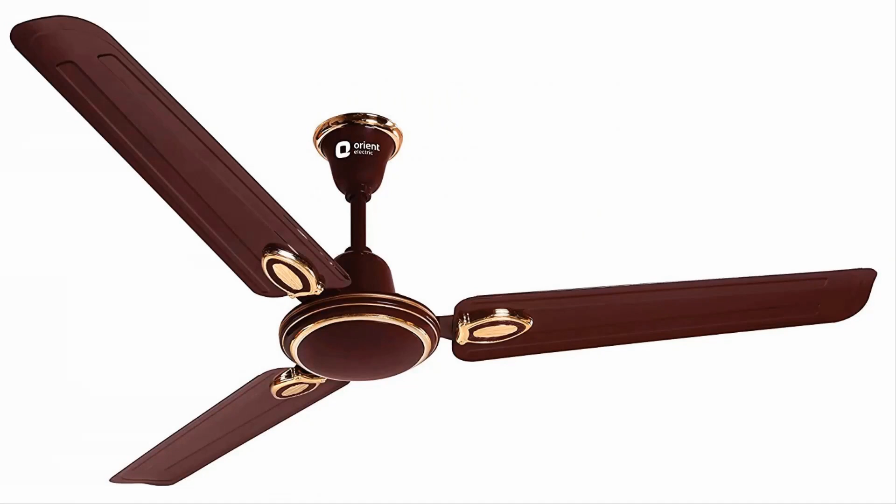An assembly is a collection of products placed together in such a way that they serve a purpose. Most of the components that you see around are assemblies. For example, a phone is an assembly consisting of components like keypad, screen, SIM card, and many chips and screws inside. A ceiling fan is a collection of wings, ball bearings, motors, screws, etc.

An assembly can have a sub-assembly. For example, a pen has a refill, cap, and base container. A refill itself is an assembly of a plastic ink container and the tip for writing. So the refill is a sub-assembly fitted into an assembly.

Now that we have learned modeling products, let us move on to assembling them. The Assemble option in Fusion 360 will allow us to position different parts with respect to each other, and also leave some degrees of freedom to move if required.

I am creating a new file and going to save it as Train Toys.

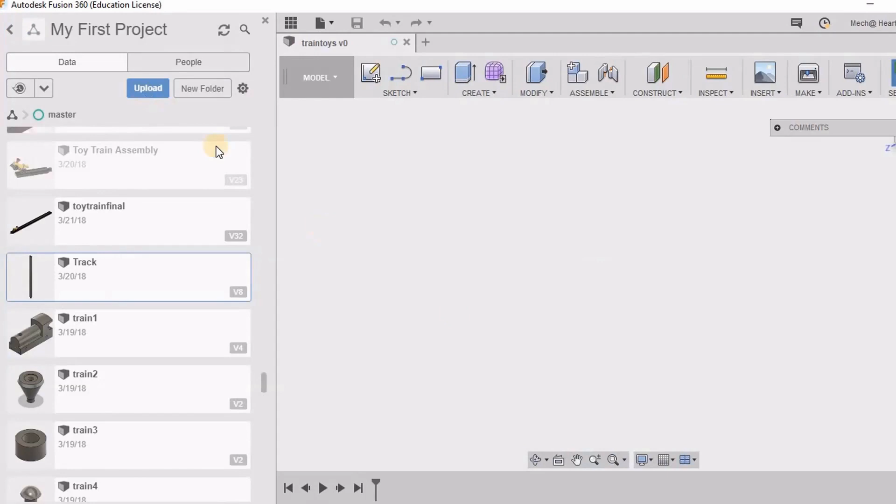Now I am going to the data panel and going to get my parts one by one. When I right click on a part, if I click open, the part will open. But if I click insert into current design, this part will be inserted into the assembly.

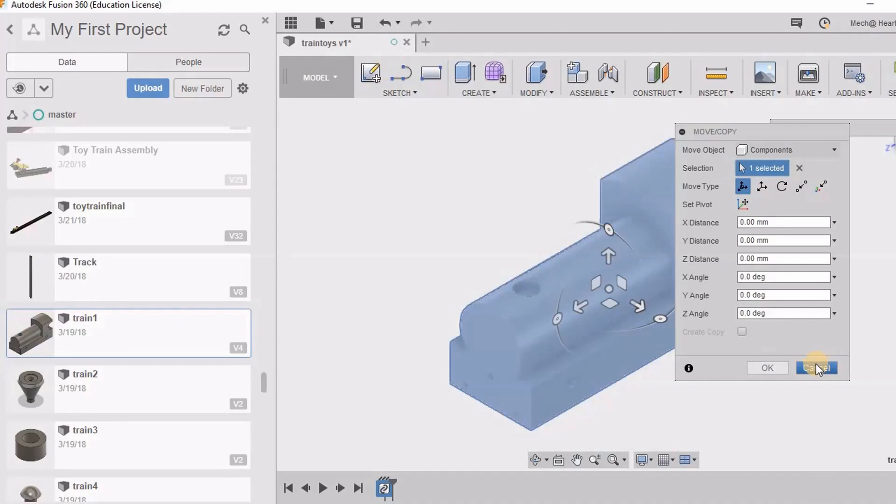Now it is asking me for the correct position. Currently, whatever position is there, I am going to say OK. Similarly, I'll be getting another component. I'll right click and say insert into current design, or I can even pull it into the current design.

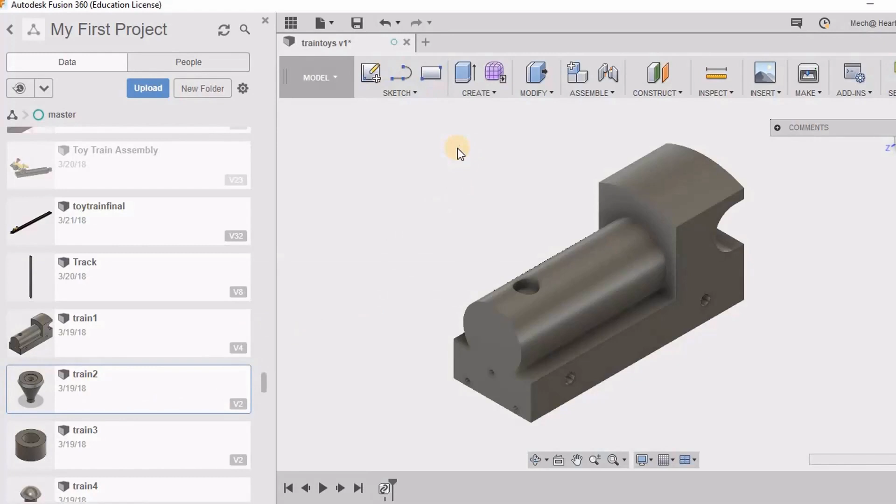So I'm closing this data panel. Now it is again asking me for the positions, so I'm going to click cancel. I can move it over here so that I can see this component.

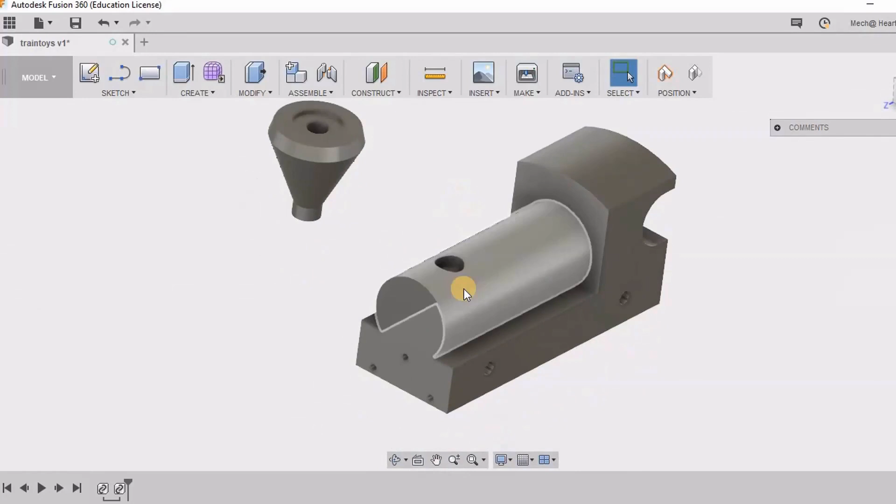The first component that we see here can be grounded. That is, with respect to this component, I'll be assembling the other parts to this. So I'm going to ground this component.

So I'm going to first see my browser, and here I have this train. I'll just right click and say ground. You can see the small grounding symbol that is appearing near this part.

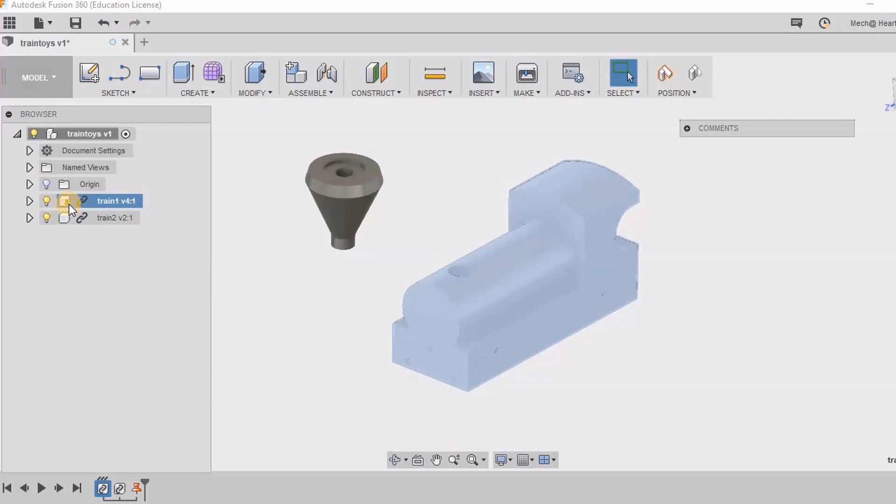So let us start assembling it. Now this portion should go inside this portion. So I'm going to click Assemble and then Joint. The shortcut key is J.

Here you can see I've got the command. Now, as you have seen, I had pulled this component, so it is asking me whether it needs to capture the current position or it can continue in the previous position. If I say continue, it will continue in the previous position.

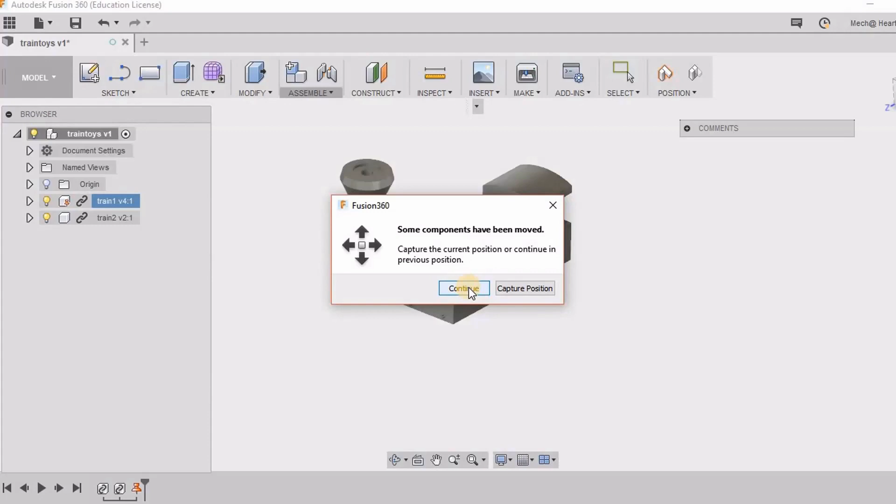For example, if I'm clicking continue, you can see it has come back to the old position. But I want this to be at this position so that I can see this product properly, as otherwise it was intersecting with the previous product.

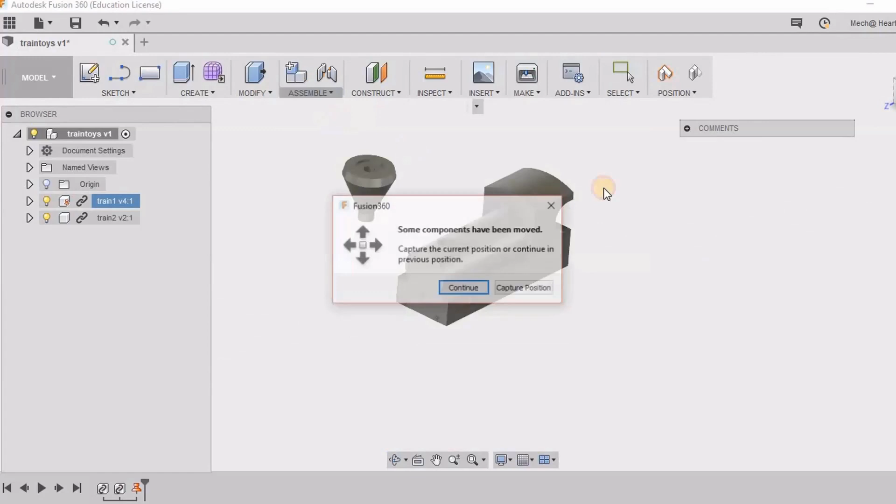So now I'm going to click assemble and joint. I'm going to click on capture position so that this remains here itself. Now here I have got component 1 and component 2. In component 1, whatever object I am going to select, that will be moved to component 2.

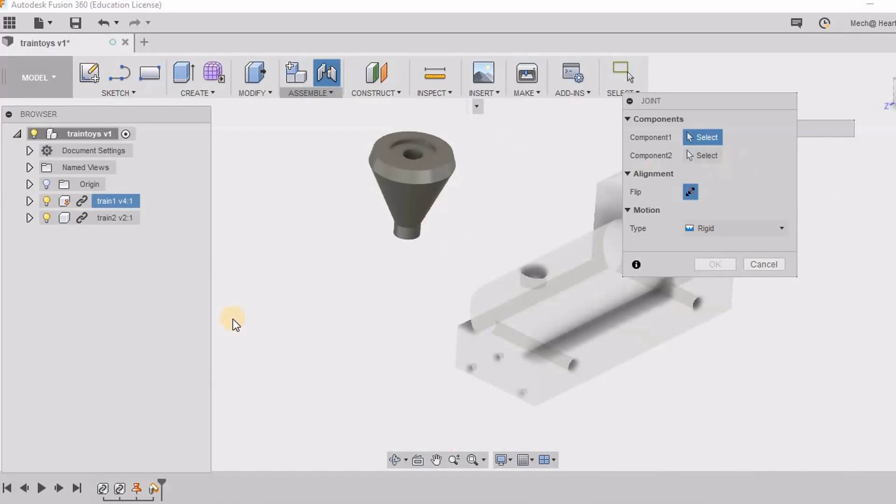That is, here I am going to select this option. So this point that I am going to select is going to be coincided with another exactly similar point that I am going to pick on component 2. So here I am clicking this.

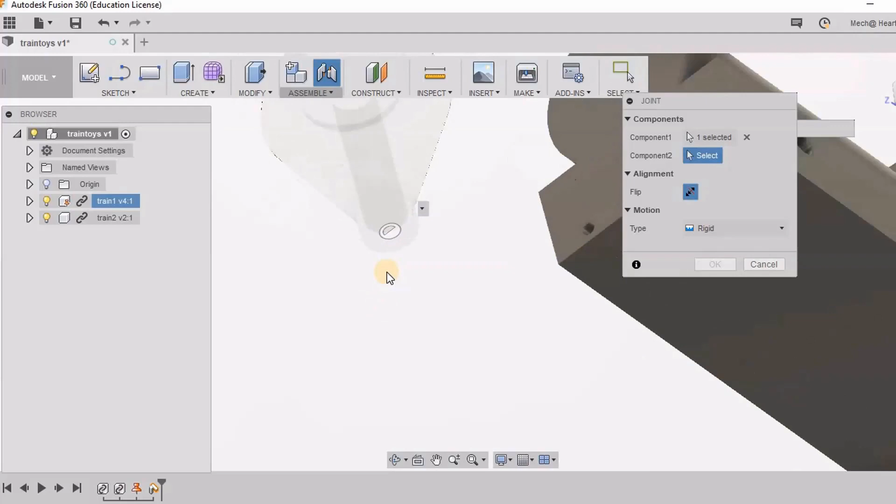My next component is going to be this. Anyway, there's only one left, and because it is grounded, anyway this component will come to this. But even if it is not grounded, the first component will always be moved to component 2. So here it is showing me different options where I can select.

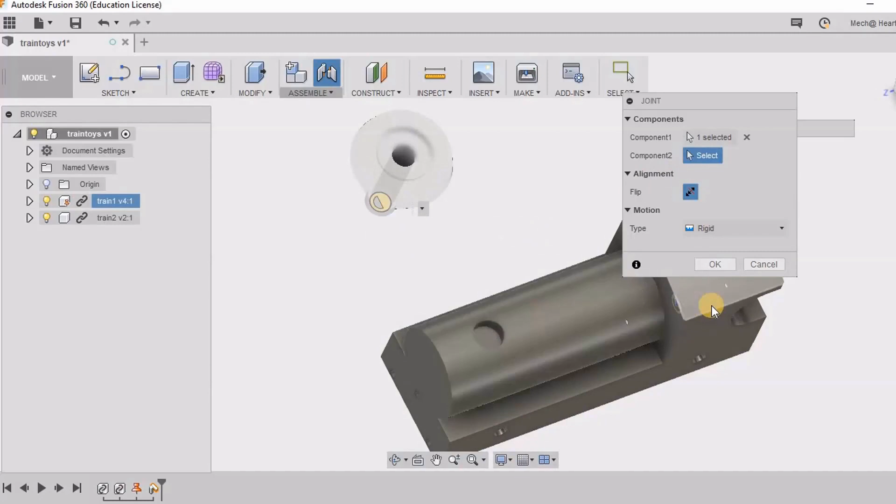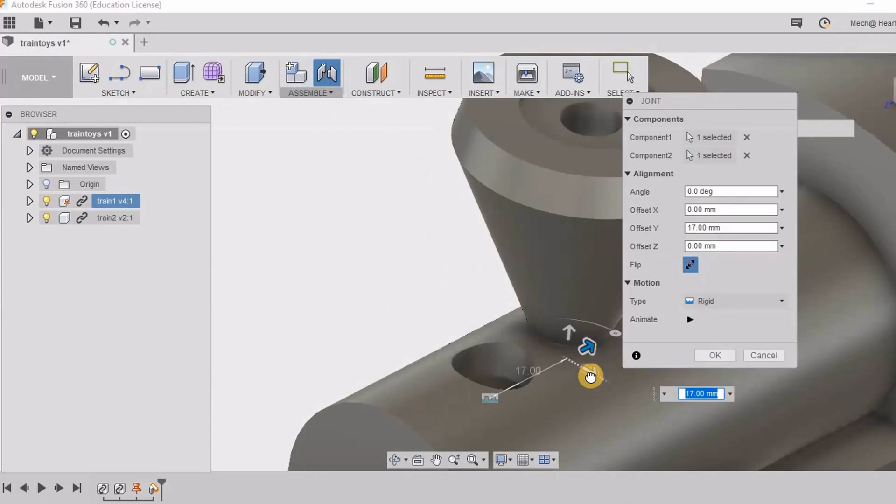I'm going to select this position because it should be exactly seated over here. So now again it is asking me the exact position. But this seems okay to me, because I want it to exactly coincide with this. But if I want to give an offset distance, I can very well give it. I can even enter it over here.

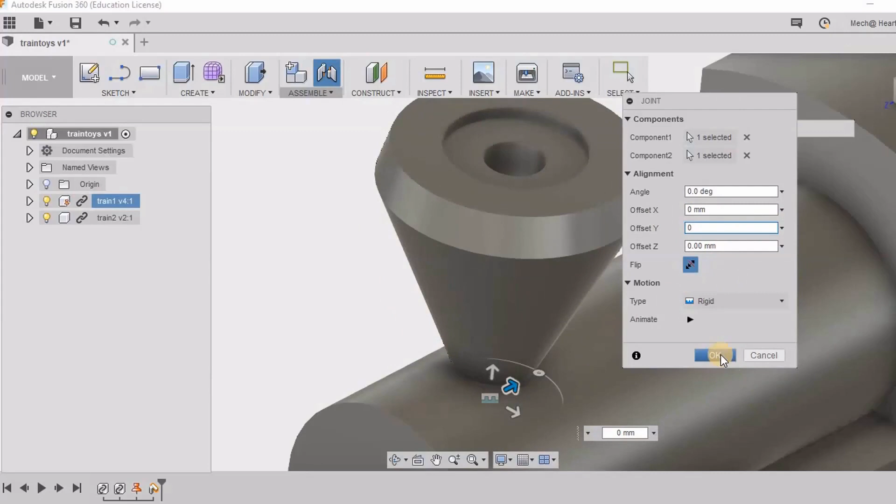Now, because this is a static component, it is not going to be rotating or sliding over it. I'm going to pick the rigid option and again give 0 mm in all directions. So we have assembled the first component.

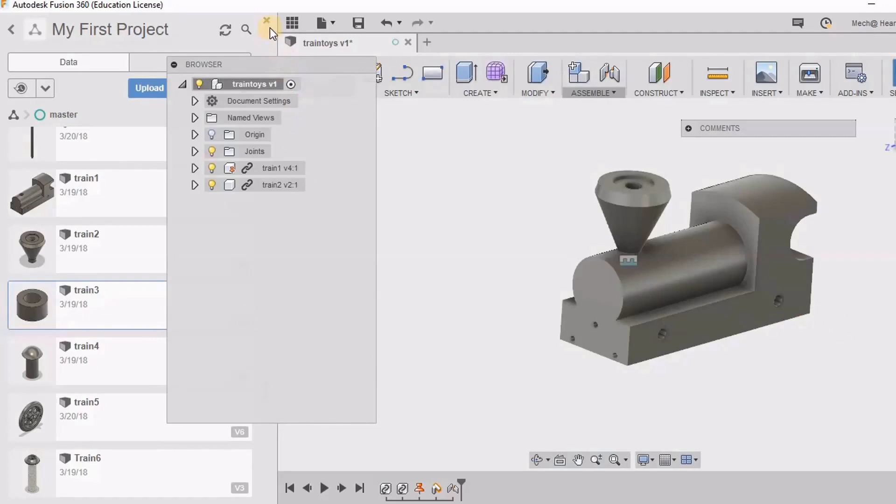Let's bring in another component, train 3. So here again I'm clicking insert into current design and I'm closing the data panel. So again I'm just clicking cancel so that it is randomly shown over here.

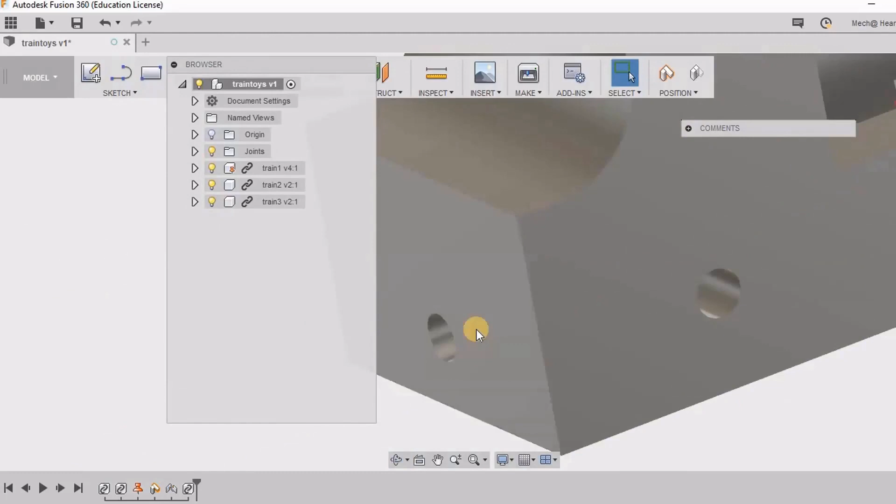Now if you see here, after going through the drawing given, I understand that this should be placed here and again tightened using a screw, which is actually the train 4 component. So again I'm going to click J on my keyboard.

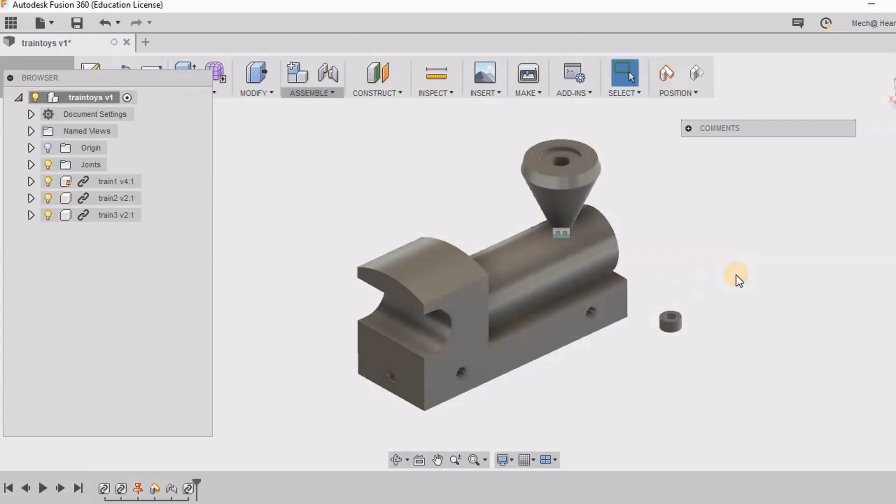Now it is asking me continue or capture position. I'm going for capture position. And now if you see, I'm selecting this portion, this top portion, and then I'm clicking near this position.

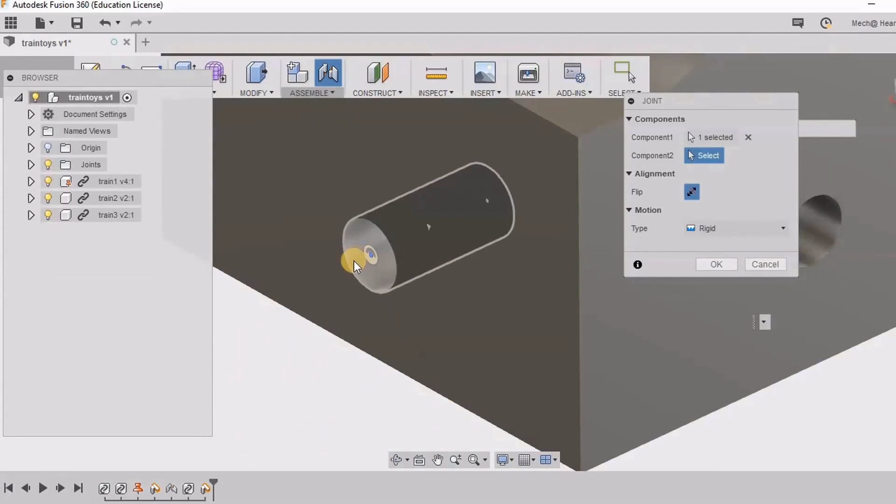So you can see actually it has gone inside, so I can flip the direction. For clarity, let me show you in wireframe mode. It has gone inside, so I can click on flip so that it is coming outside.

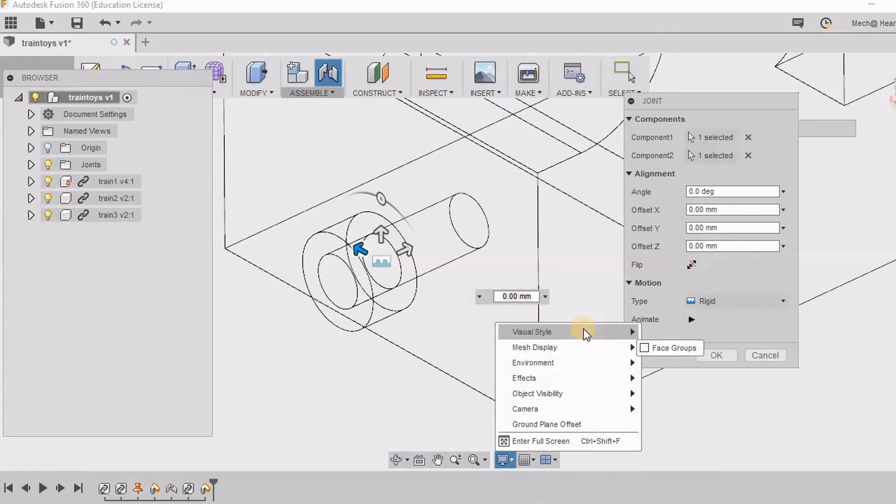Let me turn and see. Yes, it has exactly come to the position. I'm clicking OK.

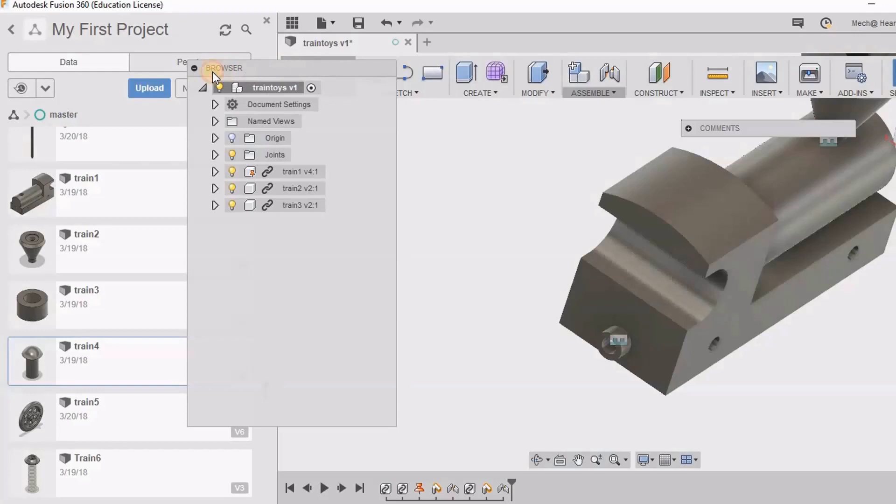Let's get another component. So from the data panel, I'm going to choose train 4 and I'm going to insert it into the current design. So here again I'm clicking cancel. I'm getting this component over here.

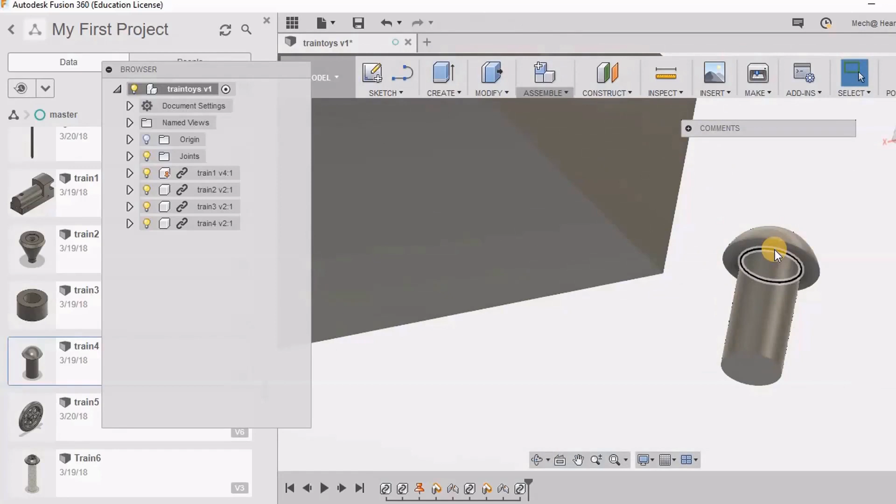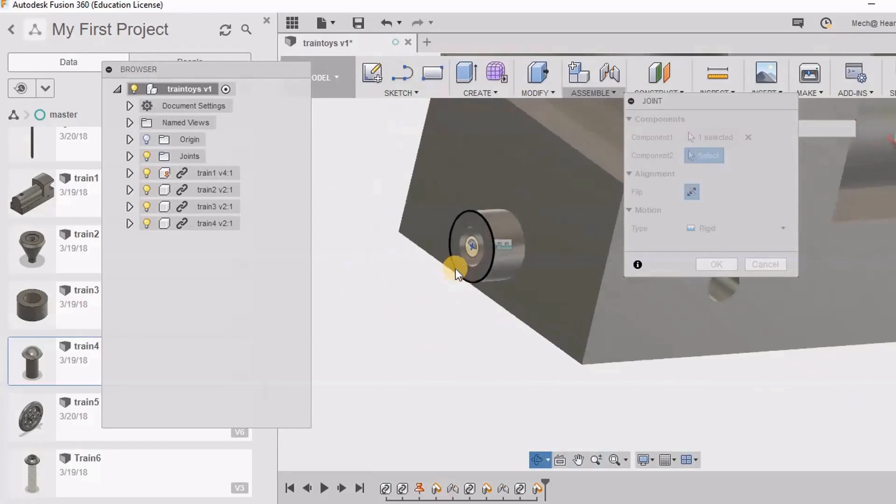Now this outer portion has to exactly mate with this portion of the screw. So I'm going to select J and say capture position, and my component 1's position is this. So this and this should coincide. So see that you are selecting only the outer portion. Now it is intact.

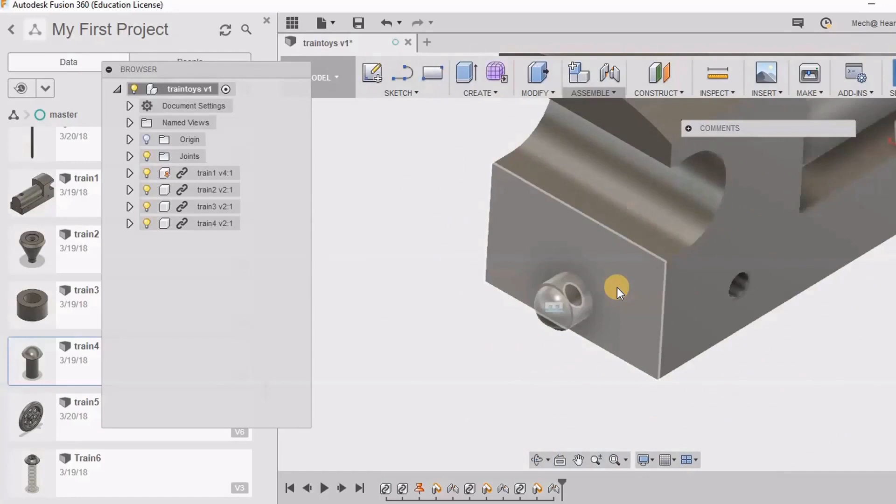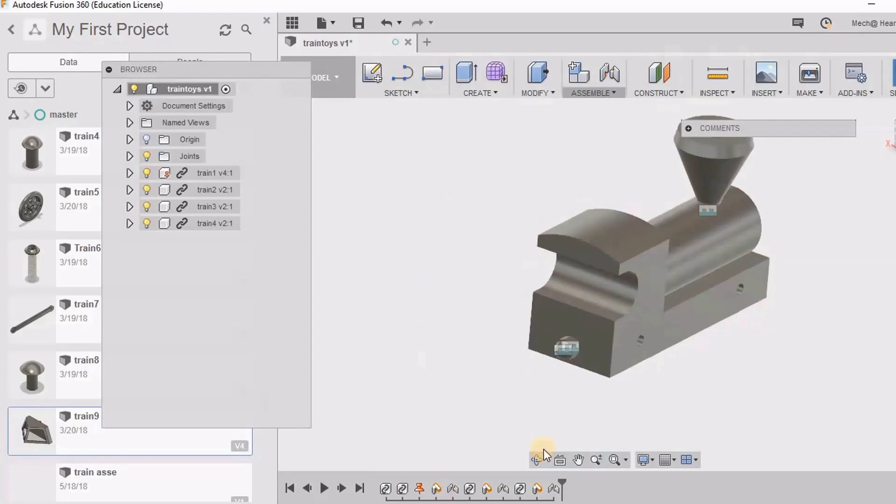Now I'm going to get the train 9 portion. I even have to add the wheels, but as the wheels themselves are an assembly, we will do that in another file and get that sub-assembly into this file. Let us bring the next component, that is train 9, and insert into the current design.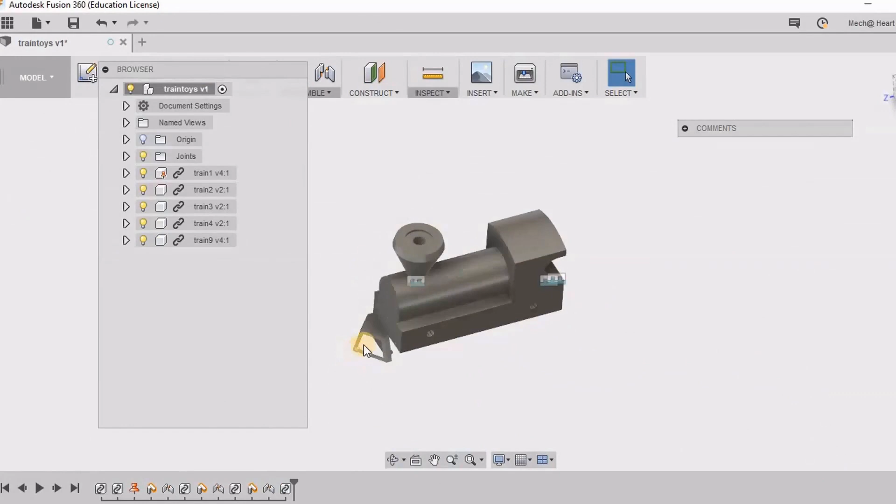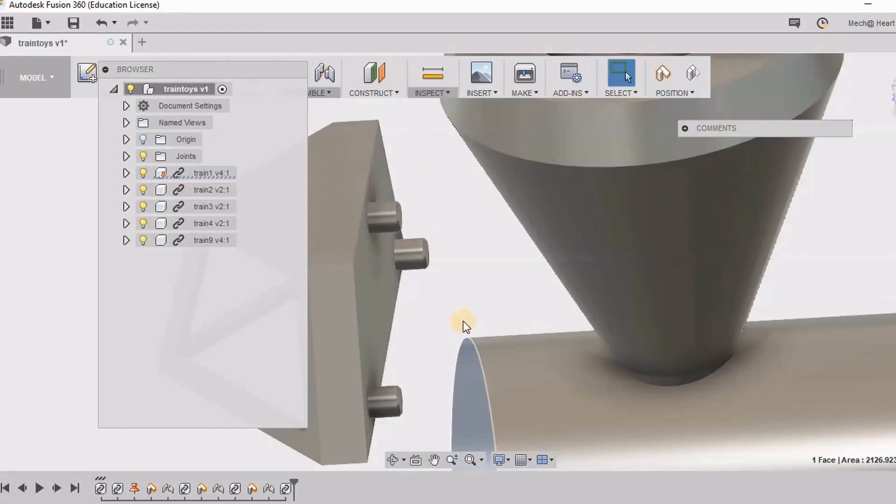So again I'm clicking cancel and closing the data panel. So if you see here, this portion or this face should exactly meet with this portion. Simultaneously, these extrusions should be able to go inside this portion.

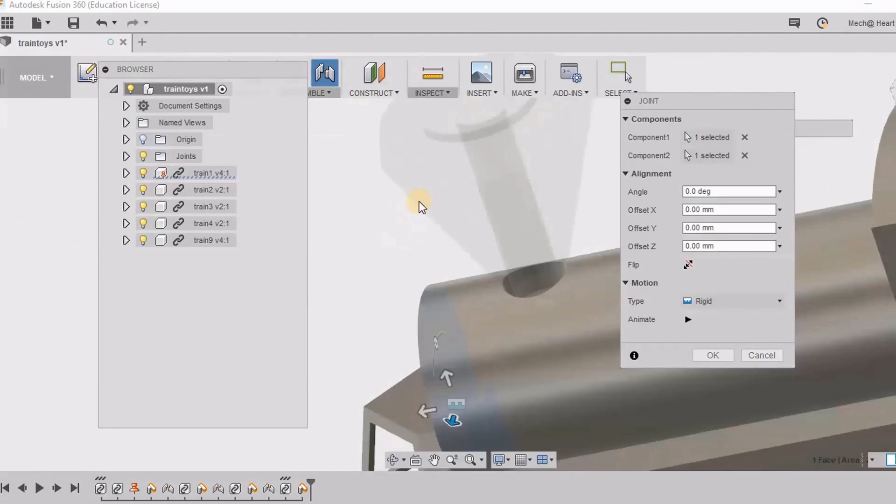So here I'm clicking J for joint and saying capture position, and I'm selecting this portion and... sorry, I think component 2 was also selected. So again I'm selecting it.

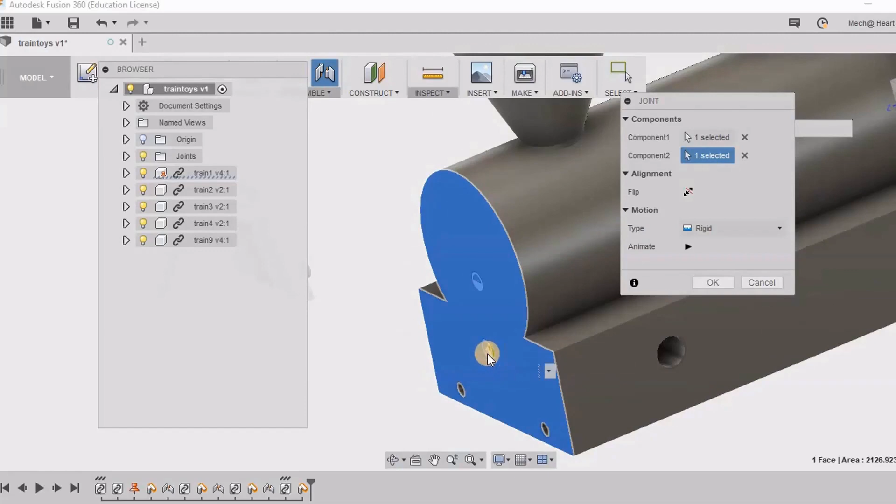So this is the portion to which it should be mated. Now you can see that all the others are also in position. We can check it using wireframe and see how all the other extrusions are also properly placed.

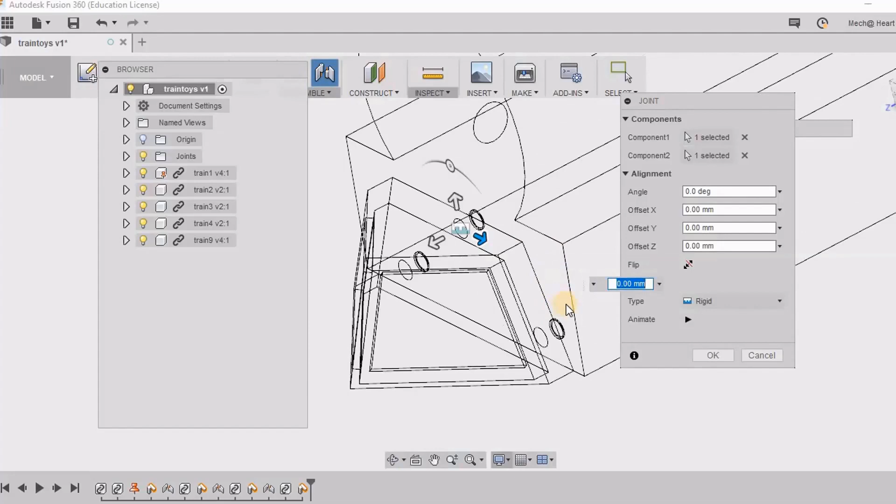I'm again going to shaded portion. So all these are rigid joints, that is they will not be able to move.

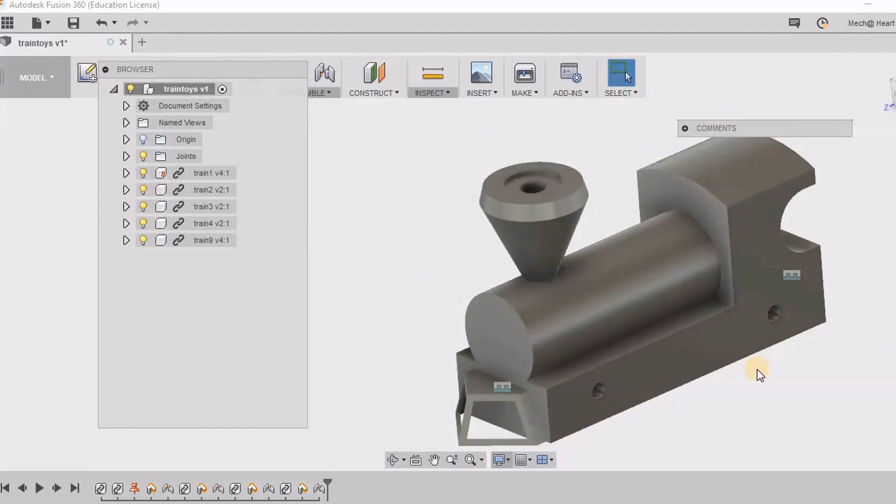Now I'm going to create a new assembly file and save it as train wheel assembly. Here I'll be first assembling all the components of the wheel.

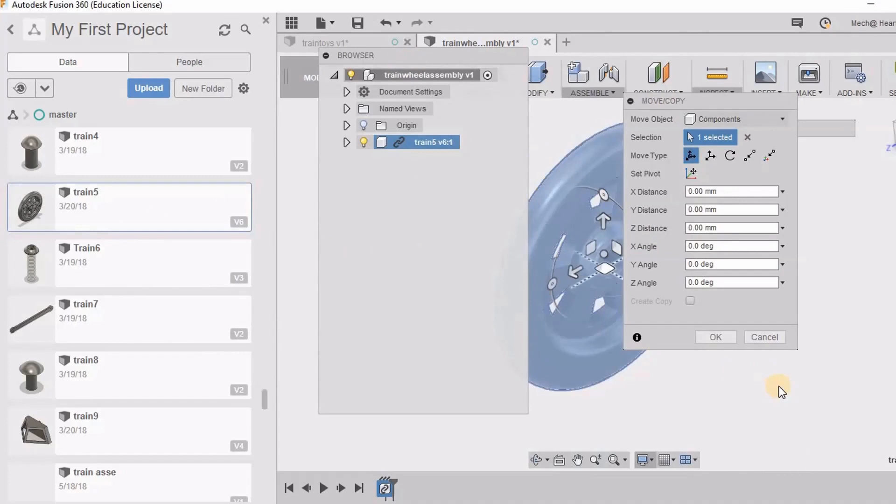So from my data panel, I will be selecting the wheel, and I'm clicking OK, and then I'm going to ground this component, because with respect to this component I'll be assembling the other components.

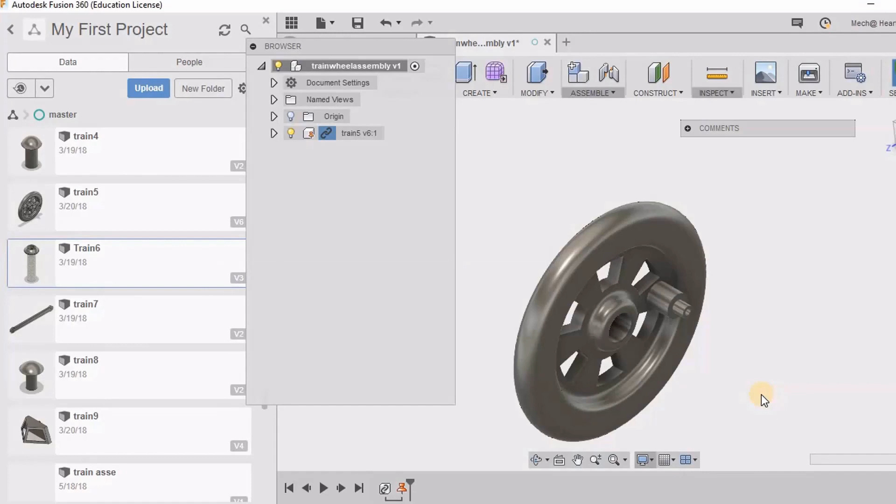So here you can see this train 6. I'm going to insert this into the current design. Just clicking cancel and pulling it out.

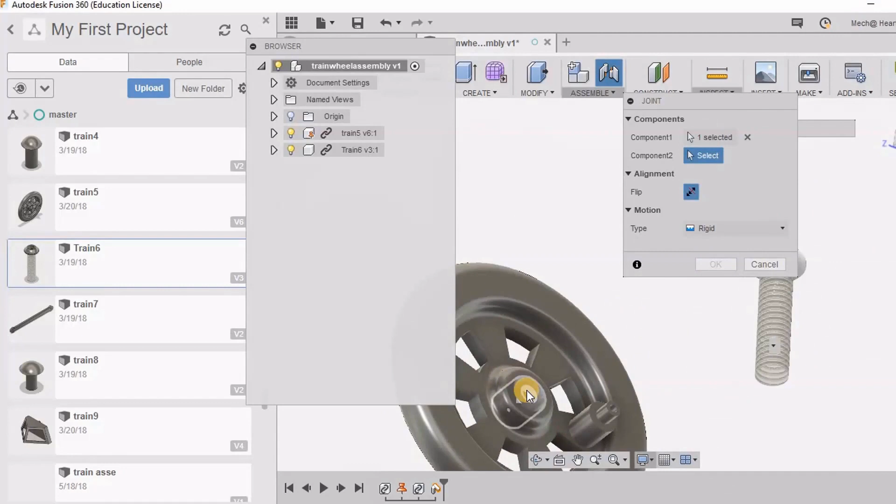Now I'm clicking J for joint, capturing this position. This is going to be my point, which should exactly come over here. But the direction should be the other way, so I've flipped it. So I click OK.

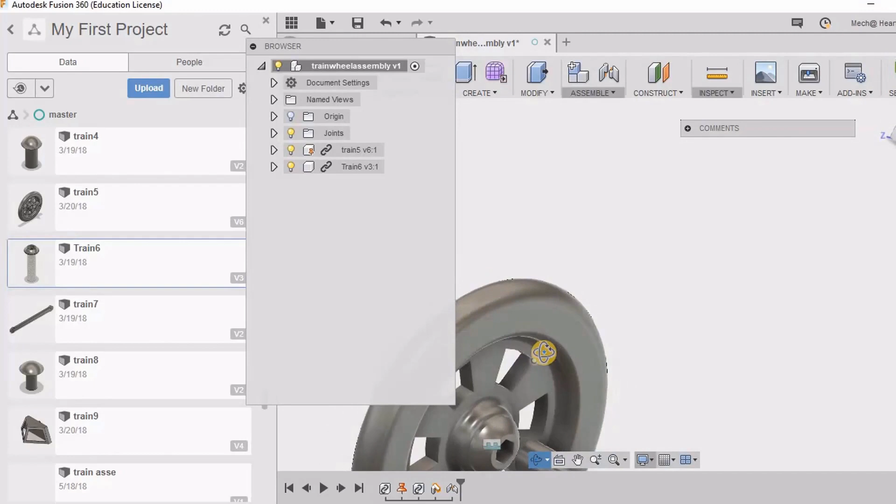So this is the wheel assembly that I have created. I can save this, and now open it or bring it into the train toys assembly.

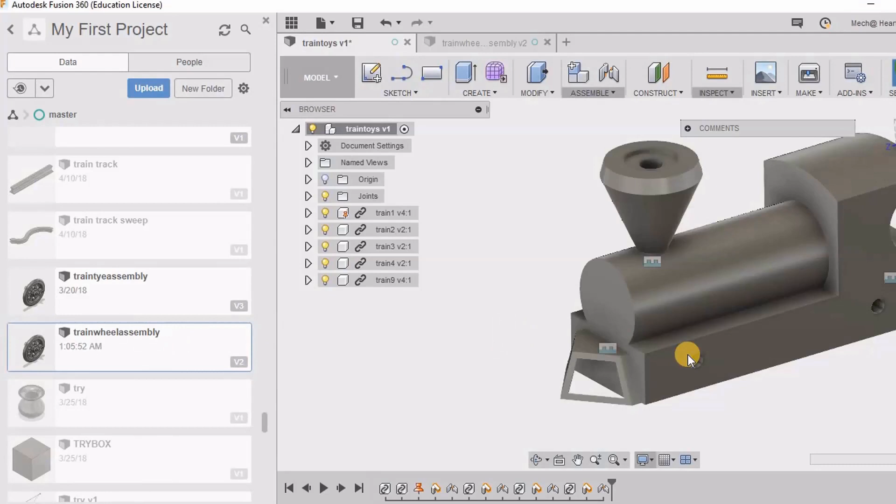Now let us bring the sub-assembly over here. Go to data panel, and here it is, train wheel assembly. Right click and say insert to current design. So here we have our sub-assembly.

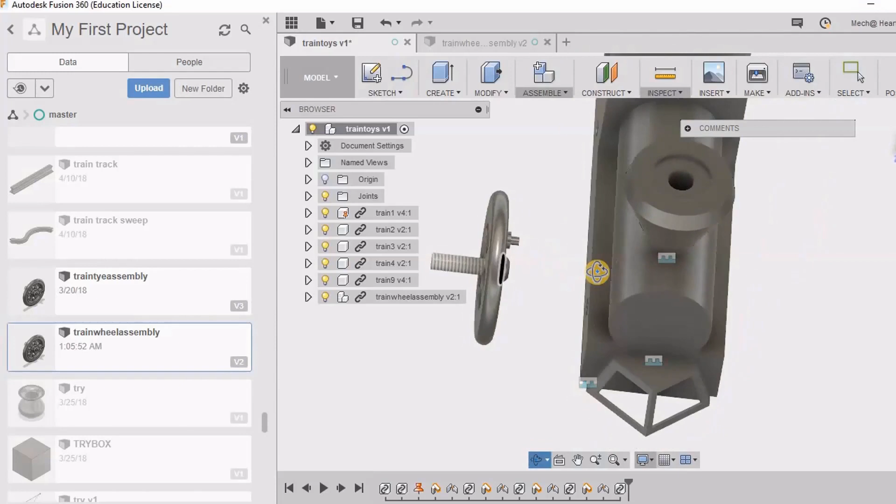So you can see that the whole sub-assembly moves together. That is, the two parts are already joined together, so they move together. Now let us select the point which has to be assembled. This works the same as we've seen previously.

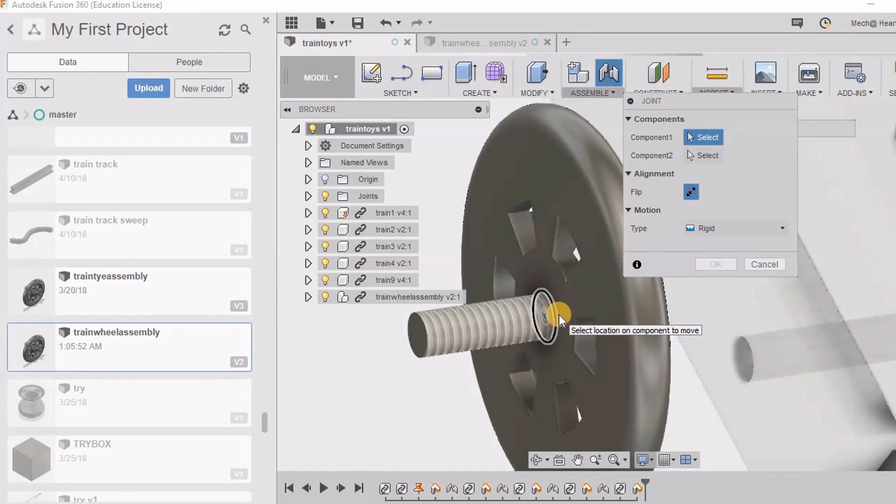Click J and click capture position, select this portion. Though it looks like we are selecting one component, we are actually selecting the whole subassembly. They will not be moving independent of each other. So you can see I have assembled it over here.

Now, because this is a wheel, I should not keep it as rigid because these wheels will be moving. So here I will be changing this option from rigid to revolute. It will show the animation also, how it will revolve. Here you can just see the right axis. The previous one was right, so I'm going to stick with it and say OK.

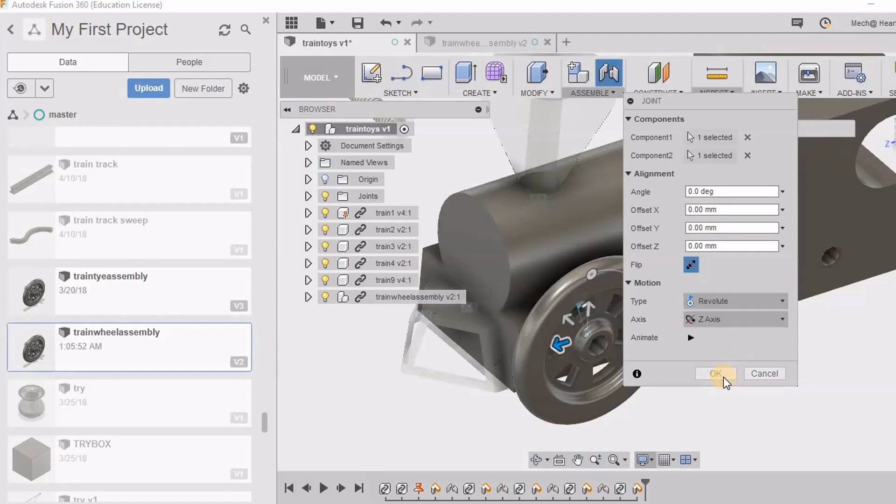So good to go. We have to assemble 3 more sub-assemblies over here. Now let us assemble the final sub-assembly.

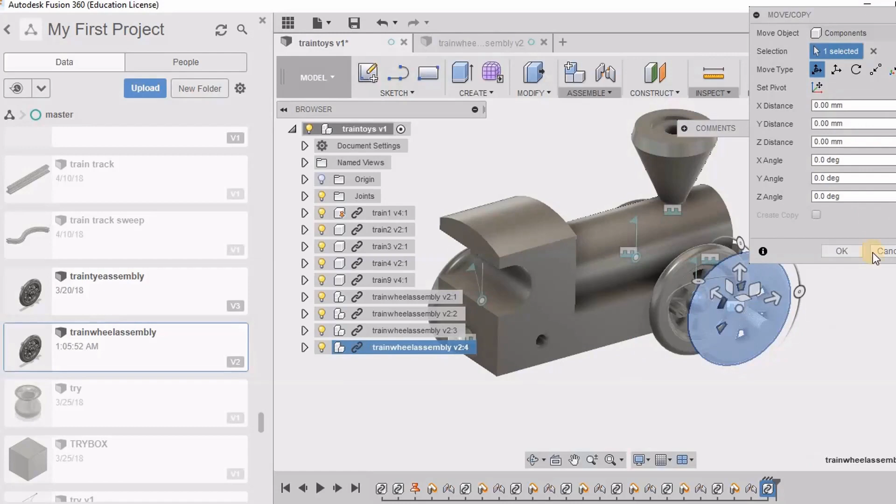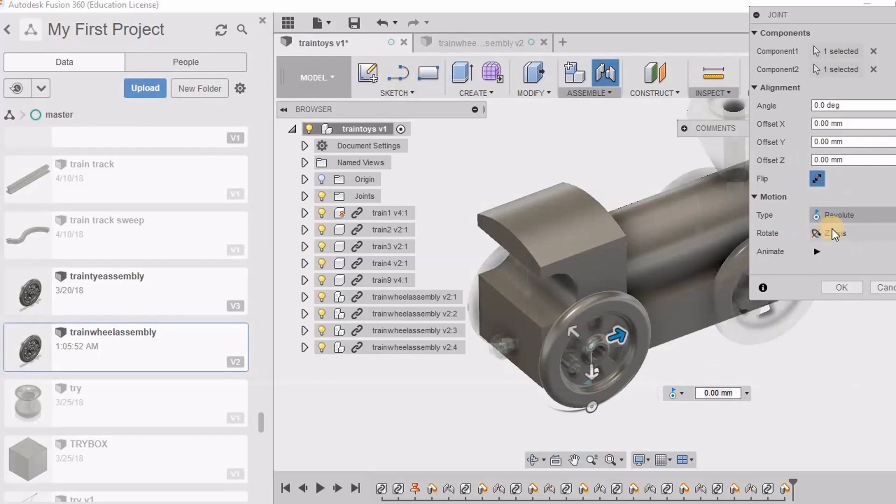Click J and capture position and select the right constraints. Let us flip it and we are good to go. You can click on animate and keep checking if the constraints are correct or not. Then click OK. So here we have the complete train assembly.

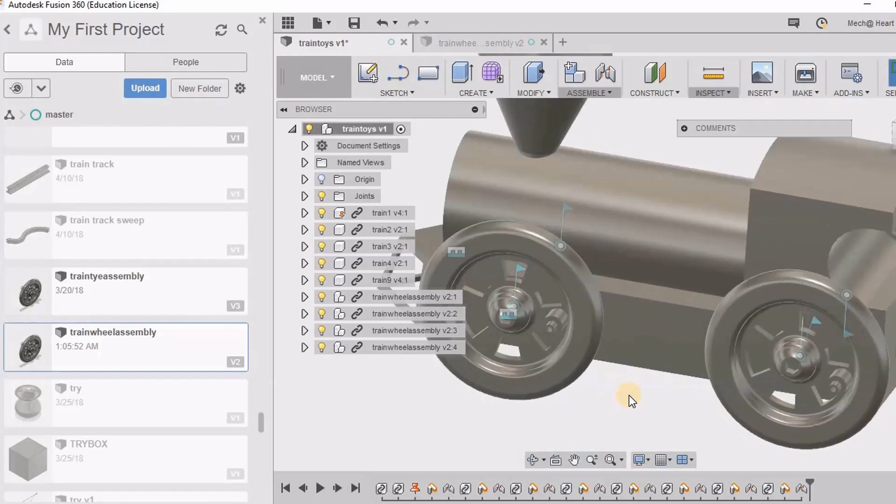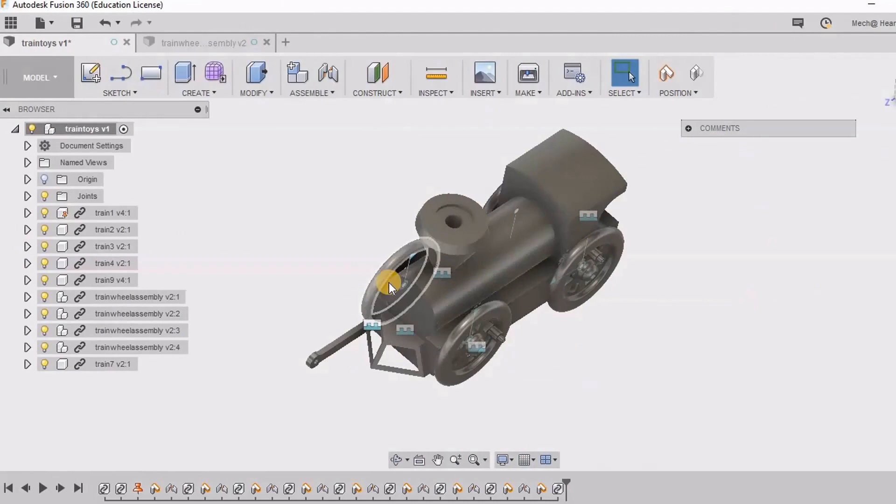Let us bring the last portion, insert into current design, the train 7 part. So here I have this part, I'm clicking cancel and closing the data panel. Now I have one of this part in this portion and the other part connecting these two wheels. So first let me assemble it with these two things.

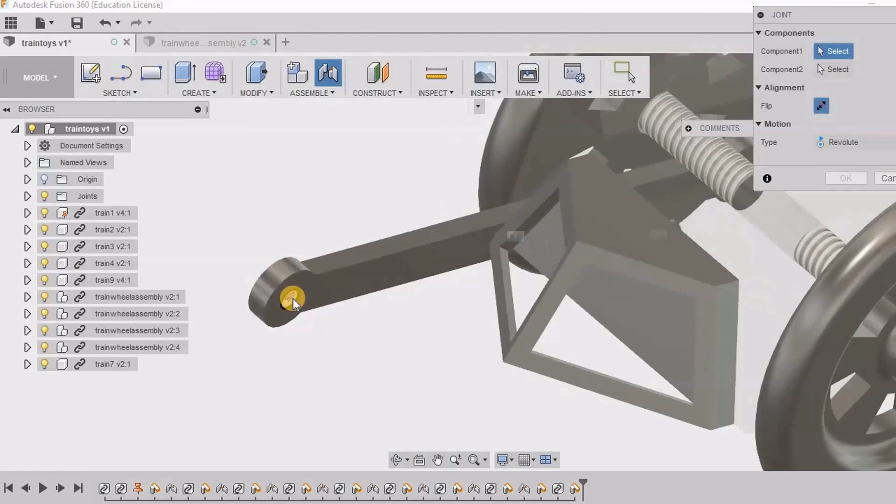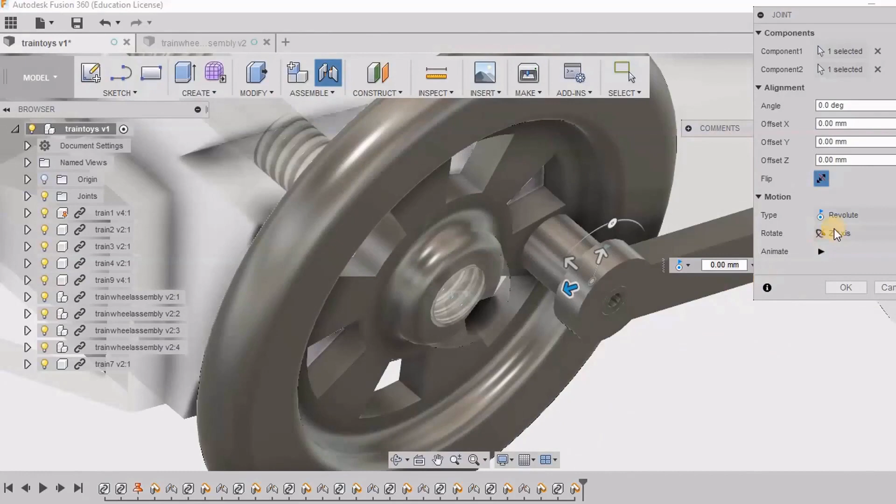So I'm going for J, capture position, selecting this and this. So here if you can see, it is going to touch that portion, going inside, so I'll just say flip direction, and I'm allowing this z-axis revolution.

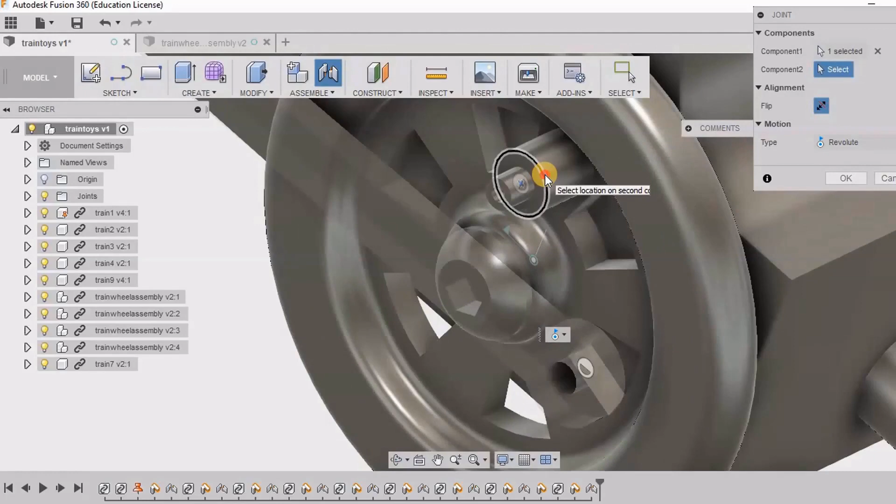Then for the second portion, I have to assemble it with this wheel also. So I'm selecting this portion and this assembly. I'm clicking OK, and you can see these two wheels - the position here is automatically aligned because that is the only possible position. Now when I'm rotating, you can see both the wheels will be rotated.

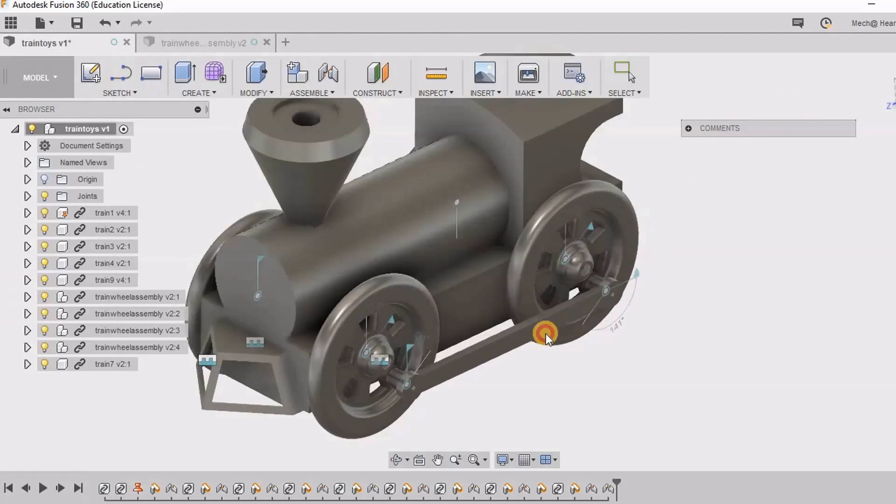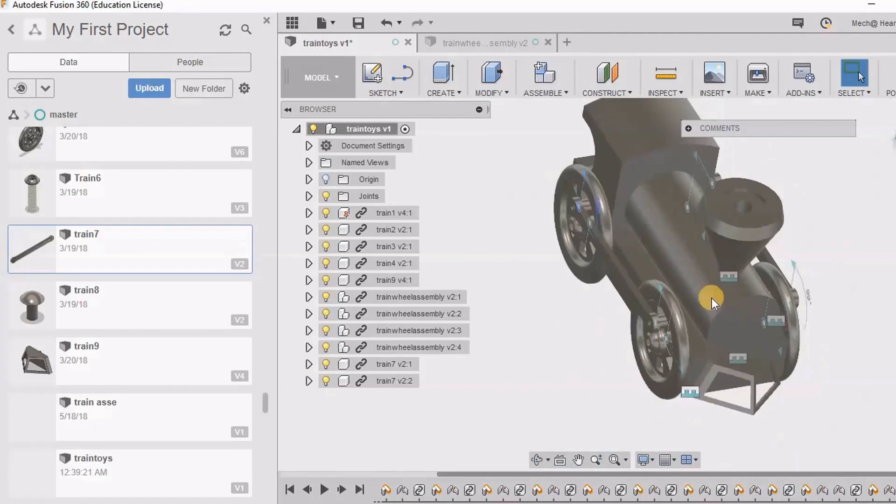By applying the same constraints, I have put the train 7 part in correct position for these two wheels as well. So here if you see, these two rods have to move in tandem with each other. That is, they cannot move independently, but have to move together. So I need to give one more joint option.

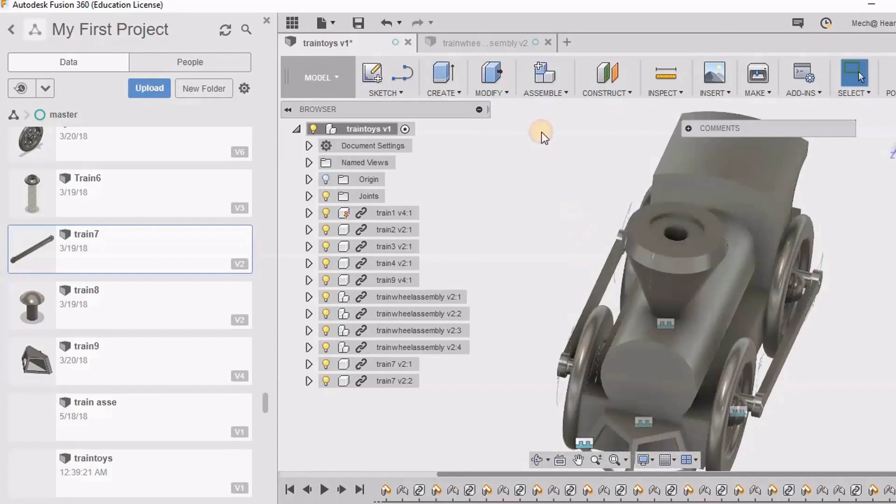So here I'm going to select J and capture position, and if you see this plane that I've selected, this plane should be in the same plane, or parallel to this.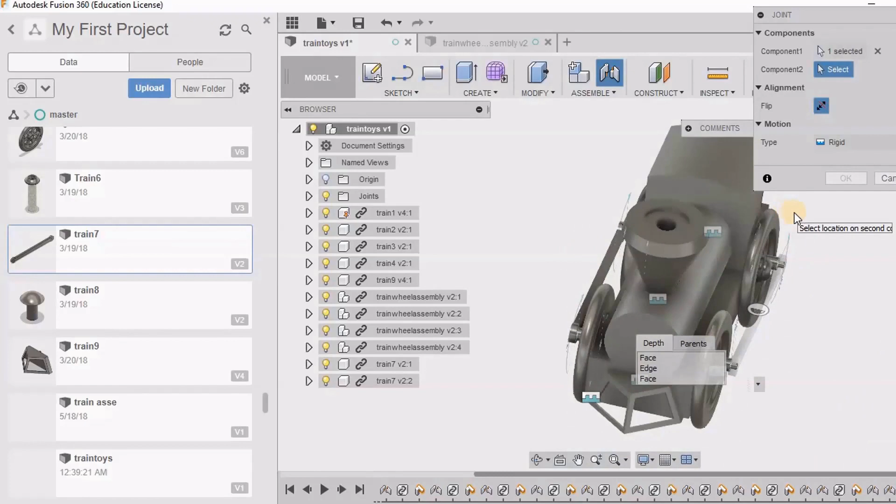So I'm selecting this point. You can see here now one is lying on the other. Now I'm going for flip direction. Now again I can say OK.

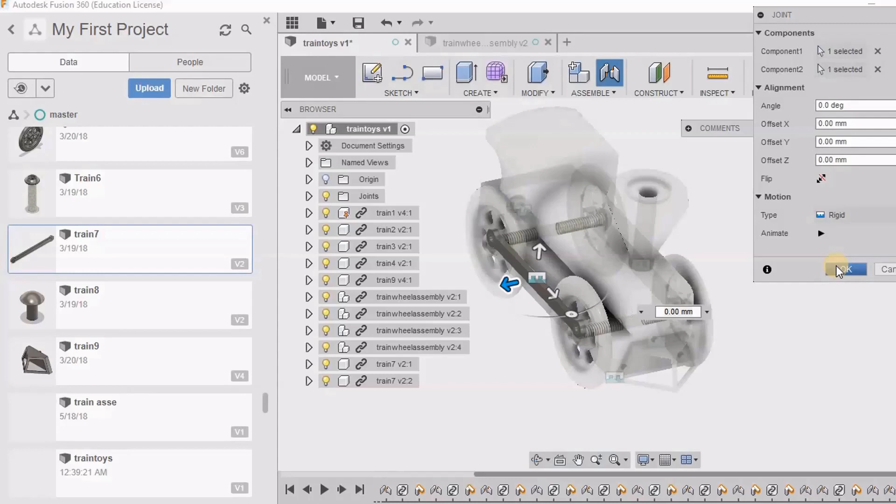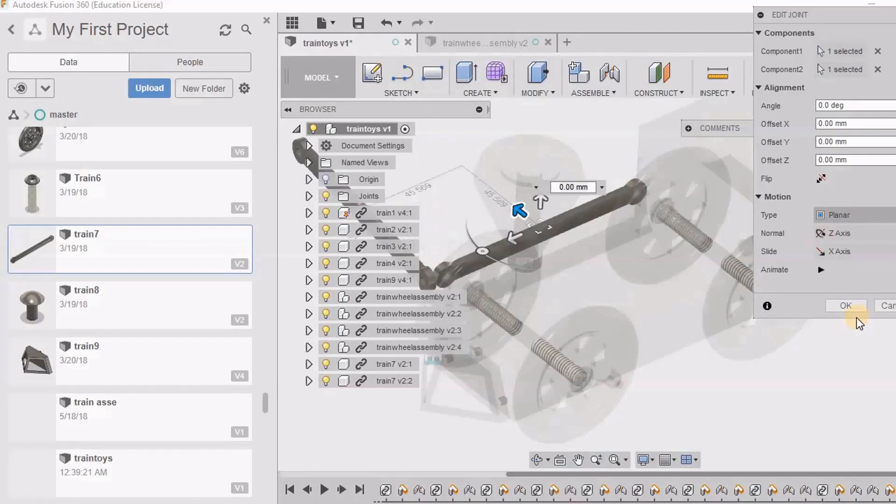Here I can go to right click and edit joint. Instead of rigid, I can give planar, and then click OK.

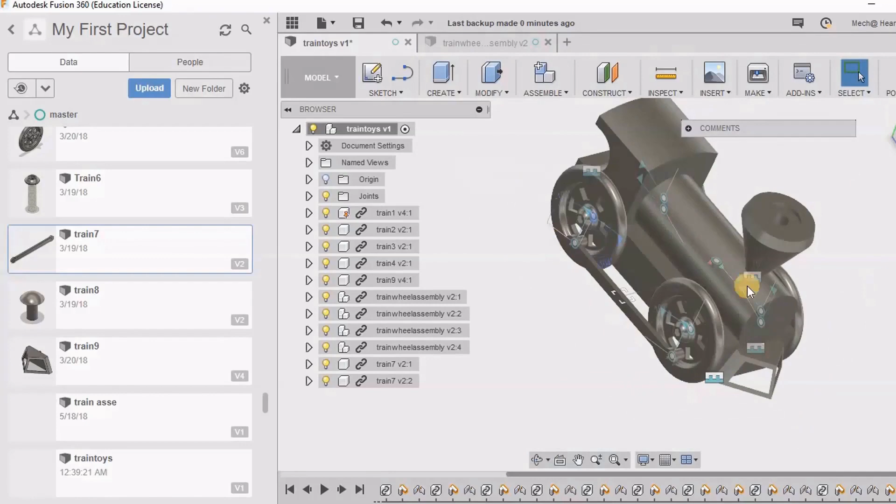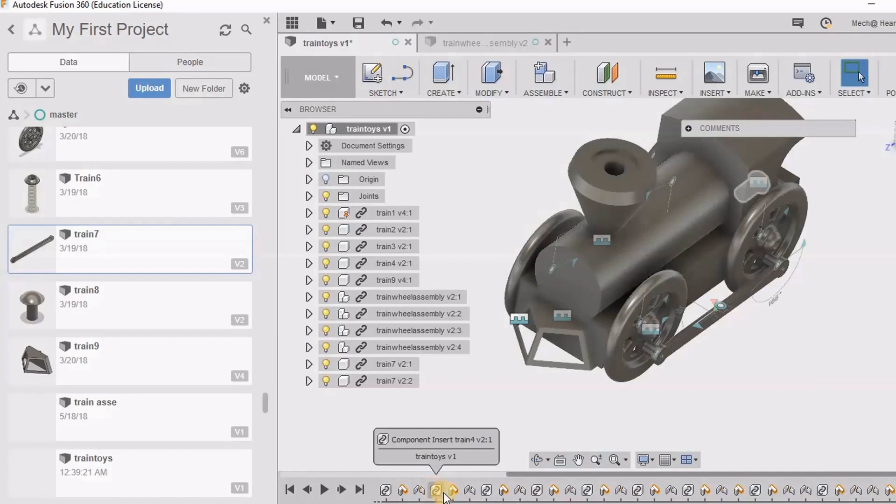So now both these options, you can see if I am moving one, the other also will be moved. So I'm here keeping it at the bottom. You can rotate and see here at the bottom you have the same movement. So the small things you see here are of course the constraints that you have given. So I can, if you have seen, all our joints appear below. So I can right click and edit any joint that I need.